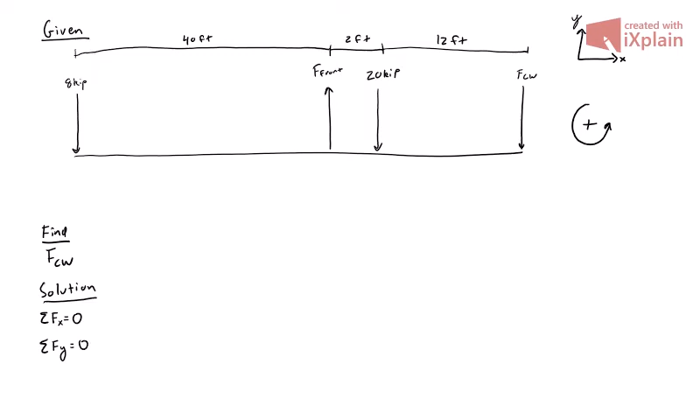So following the same process we've used every time so far, sum of the forces in the x direction is equal to 0. And we look at our picture and we see we have no forces in the x direction, so that's not very helpful. So next up, sum of the forces in the y direction is equal to 0. So we'll just go left to right. We have an 8 kip force that's going down, so that's going to be negative. We have the positive force on our front support. We have a negative 20 kip force going down, and we have a negative force from our counterweight.

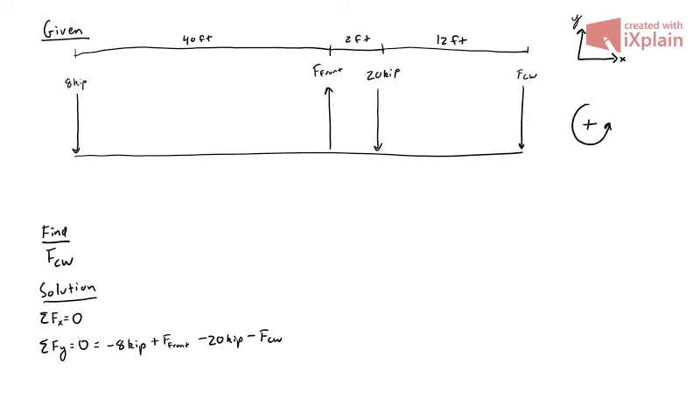So that gives us a single equation with two unknown variables, so we're not able to solve the problem, which means we now have to move into our third static equilibrium equation, the sum of the moments about any point, which is equal to the sum of distance times force, is equal to 0. So whenever we do a moment equation, we have to define a center point that we're going to measure all of these distances from. All right, so the easiest way to do this is to just pick the far left point as our center point that we're going to measure all these distances from.

And now we have to figure out which forces are going to create positive moments and which forces are going to create negative moments. So I think the easiest way to think about this is imagine the point that you've chosen as your center as an anchor point, all right? And the whole thing is going to try to spin around that. And so if that's our anchor point, our force from the front support is pushing up. So if you imagine this as a lever arm, and you're pushing up on that side of it, that's going to try to create a counterclockwise spin.

And then likewise, the 20 kip force is going to try to rotate it in the clockwise direction, and then the counterweight will also try to rotate it in the clockwise direction. So because over here I said that counterclockwise is positive, that means the front support is going to create a positive moment, and then the two downward forces are going to create negative moments.

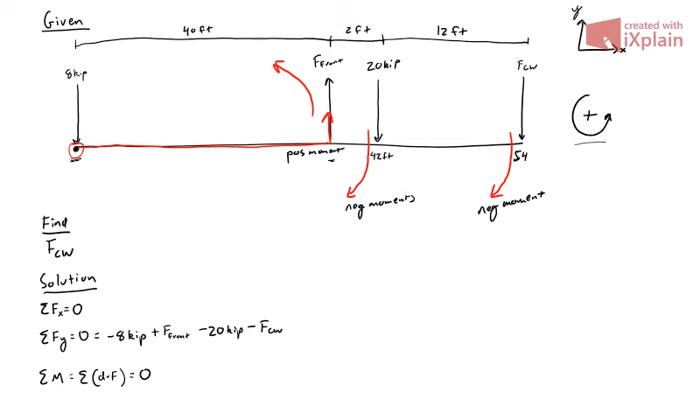Okay, and so for each moment, a moment is equal to a distance times a force. That distance is the distance between whatever we've chosen as our center point and the force that's acting on it. Okay, so for the front outrigger or the front support, that distance is 40 feet. For the 20 kip force, it's 40 feet and then another 2 feet, so a total of 42 feet of distance. And then the counterweight is 40 feet, then 2 feet, then 12 feet, giving us a total of 54 feet of distance.

And then for the 8 kip force, the 8 kip force is acting at the point that we're thinking of it rotating around. So the distance between the 8 kip force and itself is 0 feet. So if we do our moment equation, we have 0 feet times 8 kips, and then we have a positive moment of 40 feet times the force on the front support, and then we have a negative moment of 42 feet times 20 kips, and then we have another negative moment of 54 feet times the force of the counterweight.

Okay, so at that point, now we have two equations with two unknowns. So if we wanted to, we could take our sum of the forces in the y direction equation, and we could solve that for the force on the front support and get that the force on the front support is equal to 28 kips plus the force of the counterweight, and then go ahead, plug that into our moment equation, and we get that 0 is equal to 0 times 8, which is just 0.

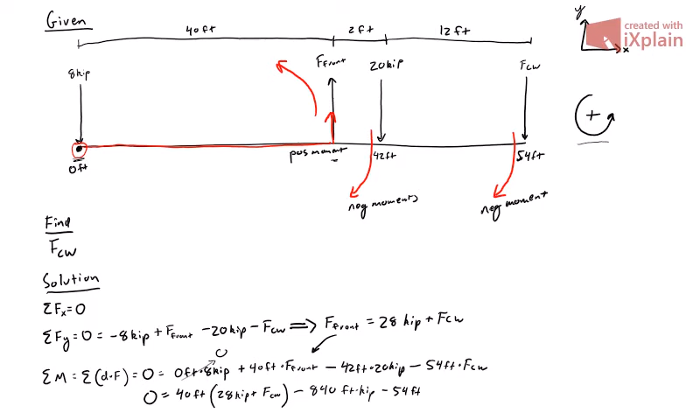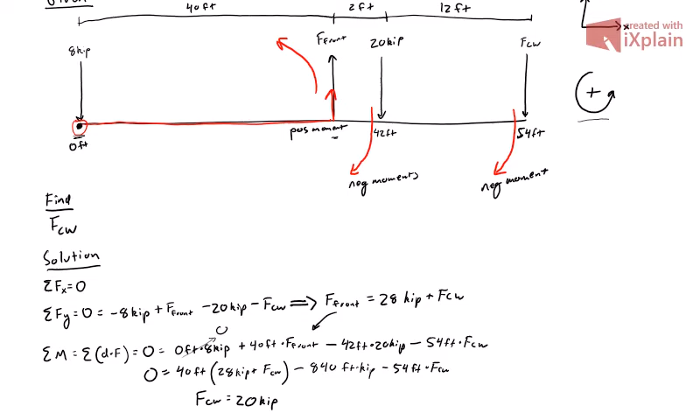So that would give us 40 feet times, in parentheses, 28 kips plus the force of the counterweight, minus 42 feet times 20 kips, which is going to be 840 foot kips, and then minus another 54 feet times the force of the counterweight. Plug all that into our calculator, and we get that the force of the counterweight is 20 kips. And then at that point, we would be done. We've solved for the force of the counterweight, and that was the only thing that the problem asked us to solve for. But there's something else that we can learn from doing these moment problems.

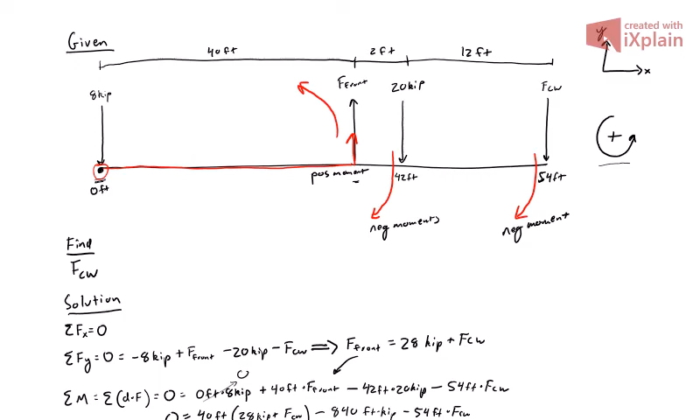So I'm going to draw another picture because I'm going to re-annotate it. So this is what our picture looked like. We had a couple forces, some up, some down, and we had two unknowns. We had an unknown on the front outrigger, and then we had an unknown counterweight force at the back. So when we did our moment equation earlier, we picked the far left point as our 0 point, and we went ahead and solved and got a moment equation.

Now, if you look at that, though, you'll notice that when we did the sum of the moment equation, one of our moments ended up being 0. We had a point where we had 0 feet times some force, and it just canceled it out. So what you can do is you can strategically pick your center point for rotation to cancel out one of the forces, because you'll have that force times a distance of 0.

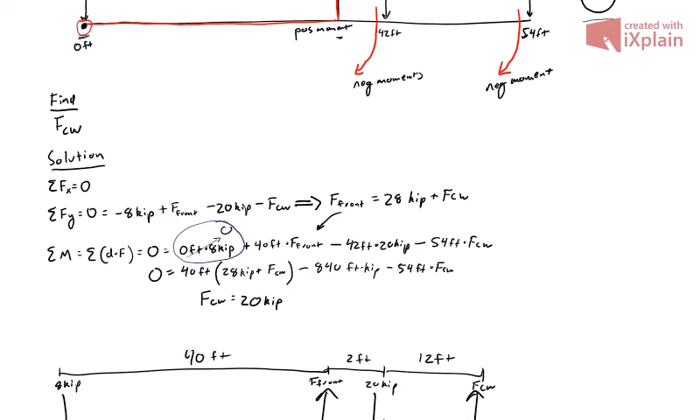So the strategic way of doing this is you look for one of your unknown forces that maybe you don't care about as much. So for us, that'd be this unknown front support force. And you say, hey, if I pick that point as the center point for rotation, my distance multiplied by that force will be 0. And so that'll make it go away from the moment equation. So there will be one less unknown in the moment equation. So let's see what it looks like if we do that.

So if we pick that front support as our center point and imagine the whole thing rotating about it, now the 8 kip force is trying to create counterclockwise motion. The 20 kip force would go clockwise, and then the force of the counterweight is also going clockwise. So that's going to be a positive moment, a negative moment, and a negative moment. So if we do sum of the moments around the front outrigger, that's equal to the sum of distance times force, which is equal to 0.